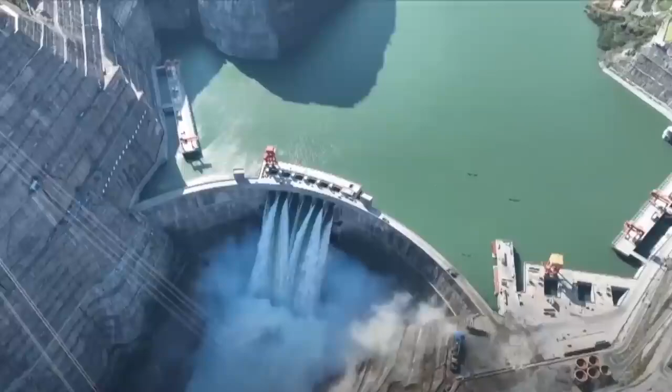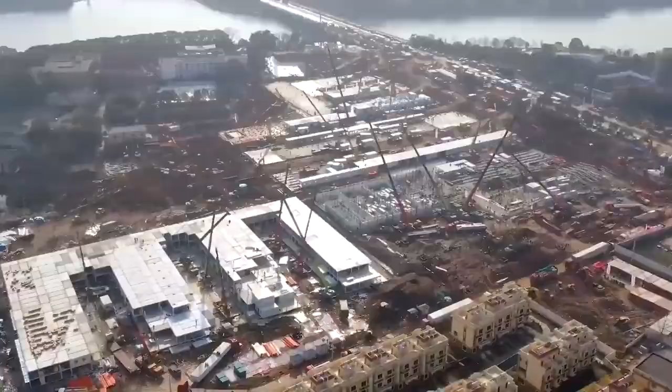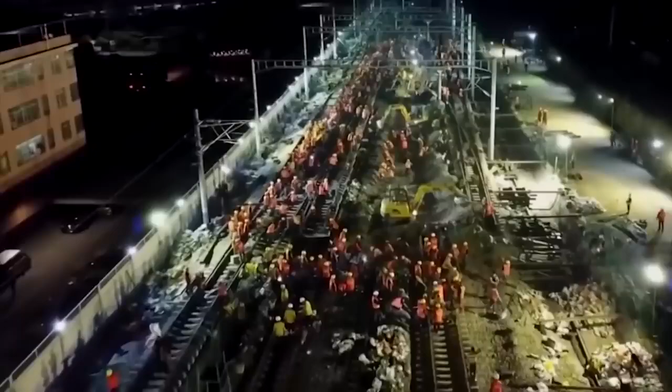Get ready to witness the impossible. China is changing the construction landscape, pushing boundaries with mega projects that leave engineers worldwide in awe. Think colossal dams that generate record-breaking amounts of electricity, tunnels built through impossibly tricky terrain, and bridges that make you feel like you're walking on air. These projects aren't just big, they're fast. China is known for constructing massive highways, sprawling bridges, and sleek high-speed rail lines at mind-blowing speeds. Advanced technology, cutting-edge construction methods, and an unwavering determination fuel this relentless pace. Some might even be shocked by this rapid progress, this ambition that turns blueprints into reality with astonishing efficiency. But how does China do it? What secrets lie behind these engineering marvels? Let's dive in and discover the ingenuity that shapes some of China's most insane megaprojects.

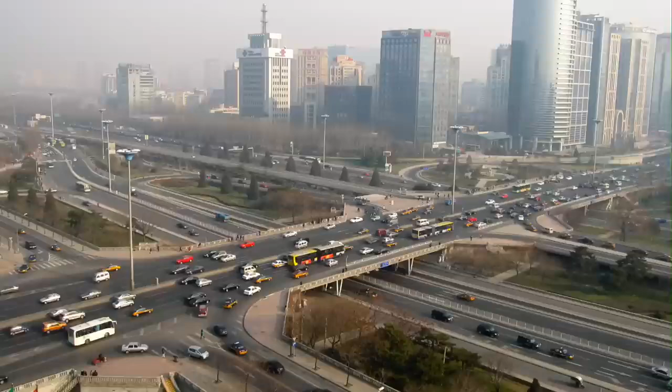The first project on our list, and it's a doozy. Imagine a city's busiest highway artery, choked with traffic day and night. Now imagine the bridge at the heart of this network suddenly becomes dangerous. Traffic can't stop, not for months. It's a logistical nightmare, unless you're a Chinese engineer, apparently. Behold the Sanyuan Bridge Replacement Project. Flashback to Beijing 2015. The Sanyuan Bridge is old, and the traffic load is unbearable. It's literally sagging under the weight. This bridge carries over 200,000 vehicles a day. Replacing it the traditional way would cripple the city for months. Nope, not an option. So here's the plan the Chinese came up with.

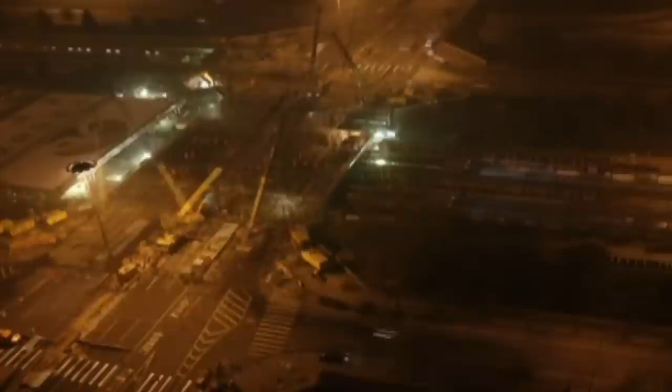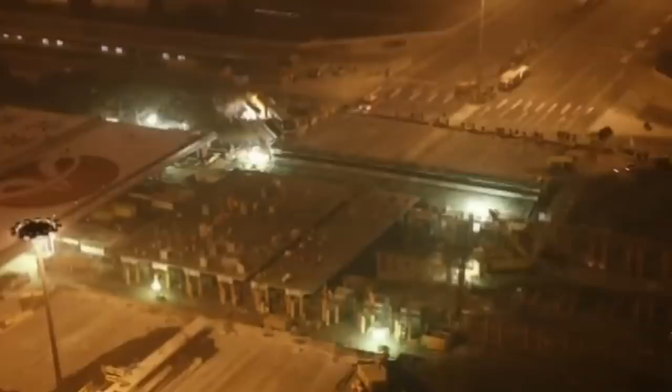Picture this: midnight, November 13th. They completely shut down the bridge. What follows is a symphony of cranes, precision technology, and raw power. The old bridge has to come down, and fast. First order of business: cut that thing to pieces. Saws slice through concrete and steel, breaking the old bridge into 27 giant chunks. The heaviest weighs about 139 tons, nearly twice the weight of a blue whale. Now, the tricky part: this demolition takes place while the old bridge is still partially standing. If we mess this up, the whole thing could collapse. Each of these gigantic chunks has to be lifted off by massive cranes, careful not to disturb the rest of the teetering structure. Talk about high-stakes Jenga.

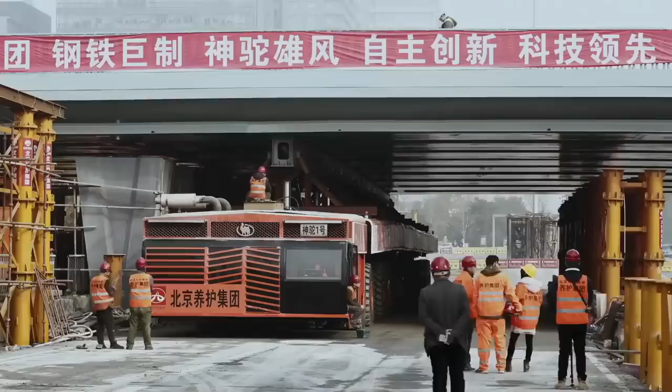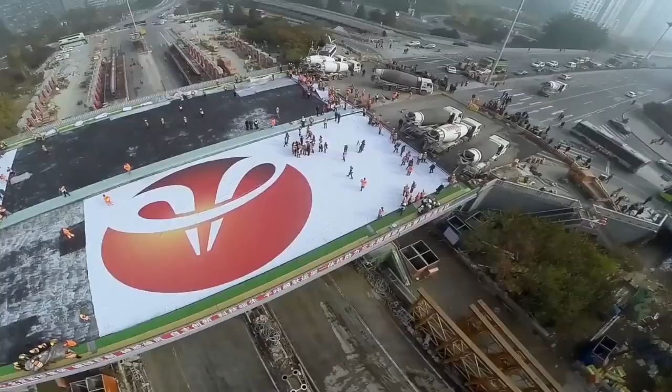But here's where it gets truly wild. While this demolition ballet is happening, the new bridge is nearby. It's massive, nearly 1,300 tons, fully assembled. How do you move something so big so quickly? Enter the Shentuo, two monstrous Chinese-made transporters. These behemoths have 96 wheels each and can lift insane amounts of weight. These machines are linked and synchronized perfectly. They grab the new bridge and start moving it like it's a toy. But here's the kicker: this bridge has to be positioned perfectly onto the old supports. The margin of error? Millimeters. They use GPS, lasers, and the whole 9 yards. It's an engineering marvel in real time. Slowly, with agonizing precision, the new bridge slots into place. And get this, from start to finish, the entire process takes 43 hours.

Less than 2 days, Beijing's traffic nightmare is averted. This project is a masterclass in speed, innovation, and the sheer audacity of Chinese engineering. It makes you wonder what other mind-blowing projects are just waiting to be unveiled. Stay tuned to find out.

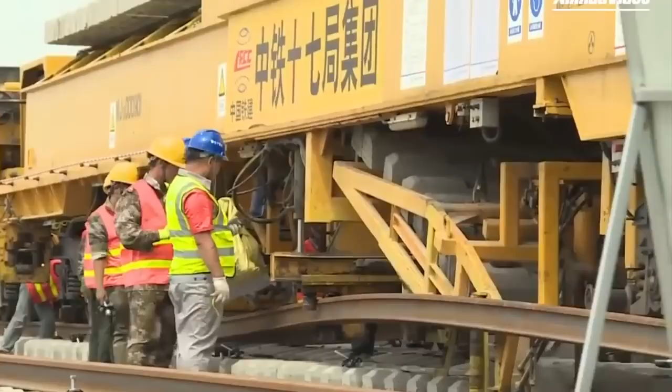Now, buckle up, because if a bridge rebuild in 43 hours impressed you, China's high-speed rail network boasts an even more mind-bending feat: constructing a functional train station in a mere 9 hours. Let's dissect this engineering marvel and see how they pulled it off.

First, some context. This wasn't a brand new station sprouting from scratch. The project involved upgrading a crucial section of track near the existing Longyan Station, a bustling hub in Fujian Province. The goal? To seamlessly integrate the station with a brand new high-speed rail line. Imagine the impact: journeys that once took 7 hours would be slashed to a breezy 90 minutes, thanks to these sleek bullet trains zooming at 200 kilometers per hour.

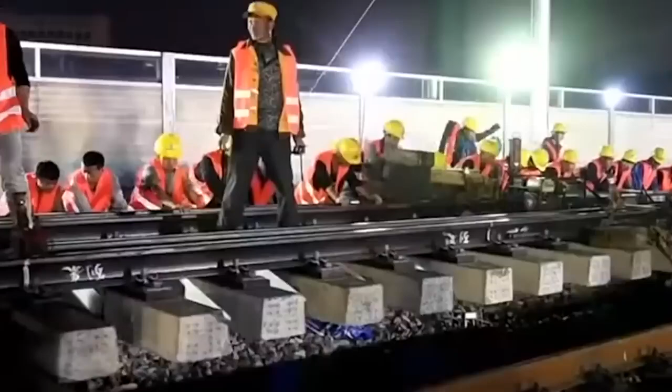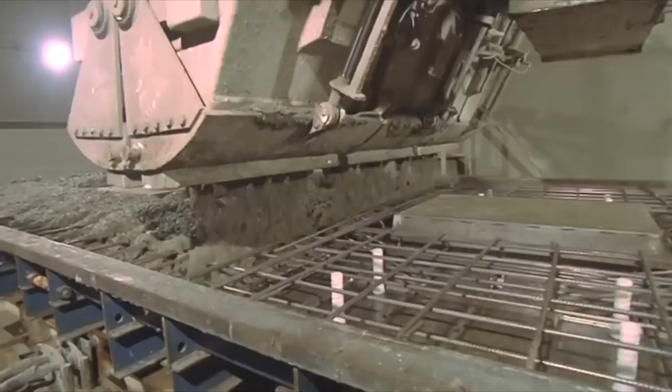Now, here's where the 9-hour magic happens. The key lies in meticulous planning and a heavy dose of prefabrication. Months before the big night, engineers meticulously mapped out every step of the process. Think of it like a high-stakes chess game, where every move needs to be calculated in advance. Prefabrication became their secret weapon. Instead of painstakingly laying the track on site, pre-assembled sections, complete with sleepers and ballast, were cast off-site in dedicated facilities. Imagine giant Lego pieces for a high-speed railway.

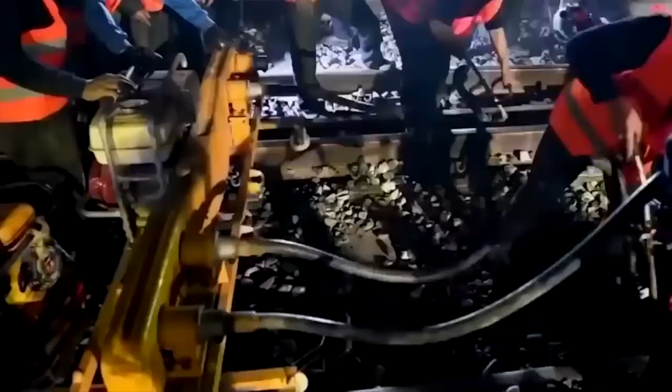The big night arrives, and 1,500 workers descend upon the site with military precision. Time is of the essence. Disrupting a major station like Longyan for an extended period would cripple the city's transportation network. So they work through the night, a well-oiled machine divided into specialized teams. One group focuses on dismantling the existing track, another on meticulously removing the old interlocking system, the complex network of switches that allow trains to maneuver between tracks. Here's where things get fascinating. Remember those prefabricated track sections? They come into play now. Specialized cranes and rail-mounted machinery, pre-positioned for maximum efficiency, swing into action.

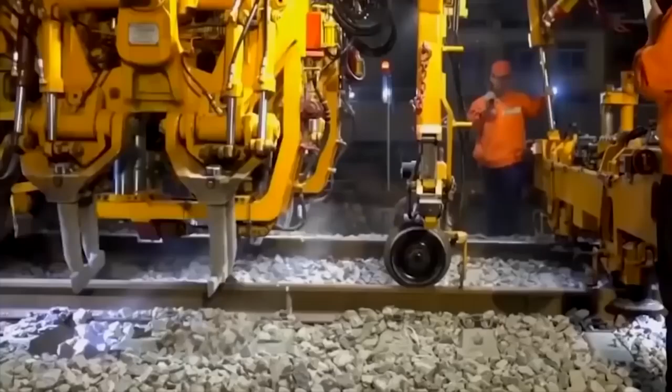The pre-built sections are carefully lifted and slotted into place with laser-guided precision. It's like watching a construction ballet, every movement synchronized to avoid delays. Meanwhile, skilled electricians meticulously rewire the entire section, ensuring seamless integration with the existing signaling system. These guys are the unsung heroes, making sure trains can navigate the new track safely.

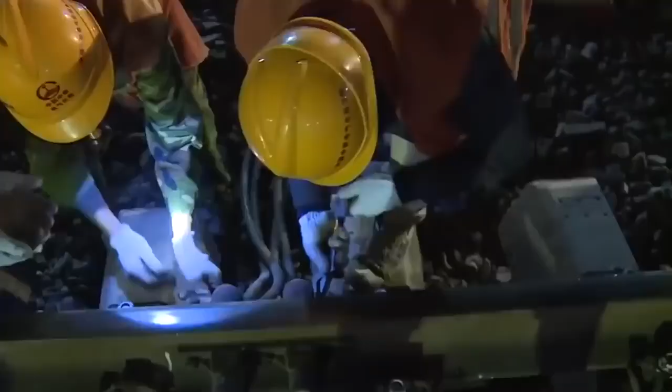As the prefabricated sections are laid, other teams tackle the ballast, the layer of crushed rock that provides stability to the tracks. They use specialized machinery to spread and compact this crucial layer, ensuring a smooth ride for future high-speed trains. With clockwork precision, the teams work through the night.

The old interlocking system is replaced, the prefabricated track sections are secured, the ballast is compacted, and the electrical connections are complete. As dawn breaks, they take a collective sigh of relief. The impossible has been achieved. A fully functional section of track, ready to handle the high-speed behemoths, has been built in a mere 9 hours.

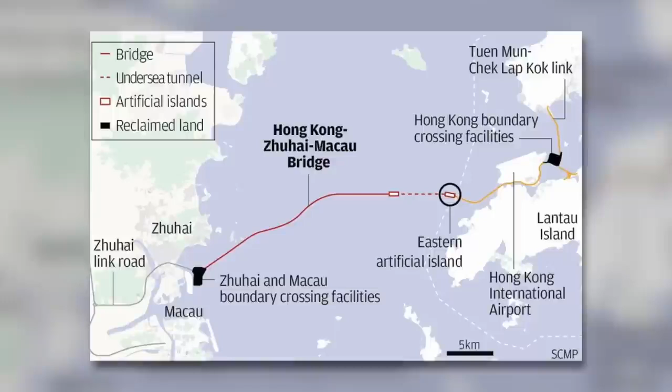If you thought a 9-hour train station was impressive, buckle up. China took on a maritime challenge of epic proportions, designing and constructing the world's longest sea crossing, the Hong Kong-Zhuhai-Macau Bridge. This behemoth, stretching a mind-boggling 55 kilometers across the Pearl River estuary, isn't just about convenience. It's a linchpin in China's ambitious plan to transform the Greater Bay Area, a network of 11 cities, into an economic powerhouse. Here's where engineering ingenuity meets ambition.

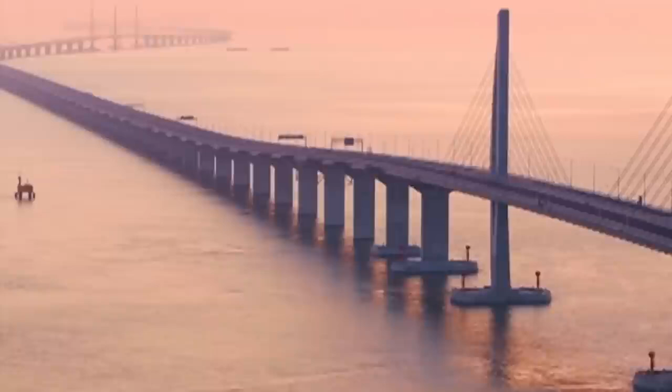This wasn't a simple bridge build. Picture the challenges: frenetic shipping traffic, the wrath of typhoons, and delicate marine ecosystems, particularly those of the iconic Chinese white dolphins. The solution? A complex feat combining bridges, tunnels, and artificial islands.

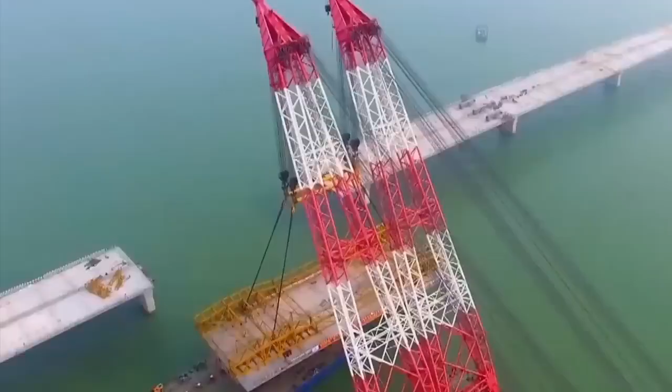Let's focus on the main bridge, a 29.6-kilometer marvel in itself. To minimize disruption and preserve those dolphin habitats, engineers opted for slender, single-column piers anchored deep into the seabed. Above the waves, 3 cable-stayed bridges, each with unique, sail-like towers, rise to support the massive carriageways. It's an aesthetic statement as much as an engineering achievement.

Now, about those artificial islands. These aren't just mounds of sand dumped into the sea. They've been meticulously engineered, structures crucial to the bridge's functionality. They seamlessly transition traffic from colossal bridges to a 6-kilometer-long underwater tunnel. Think of them as giant traffic interchanges in the middle of the ocean.

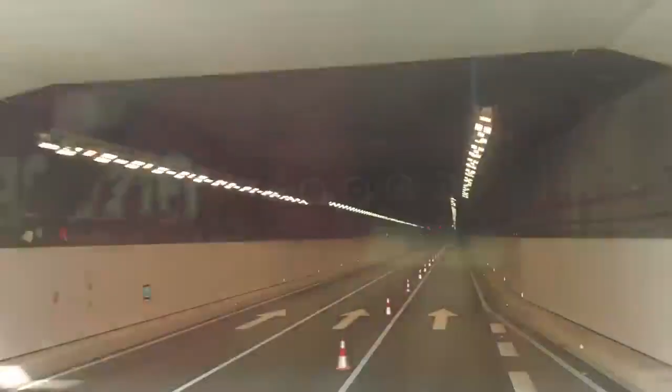Speaking of underwater tunnels, this project features one of the most complex ever built. Instead of boring through solid ground, it's made of 33 massive concrete sections, each weighing a staggering 80,000 tons. These sections were carefully lowered into place, forming a massive underwater highway. It's a testament to the precision and power of Chinese marine engineering.

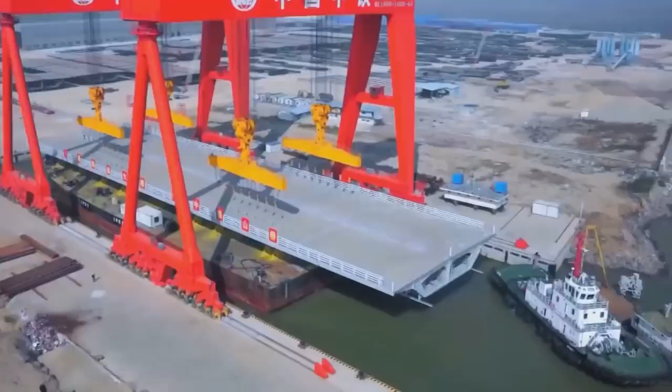And let's not forget the logistics behind this mega project. Coordinating massive construction teams, specialized machinery, and the movement of building materials across land and sea over a 9-year construction period is a ballet of planning and problem solving. The result? A journey that used to take hours by ferry now takes a mere 40 minutes by car. The ripple effects are huge: increased trade, a boost to the tourism industry, and the symbolic binding of major cities into a future regional powerhouse.

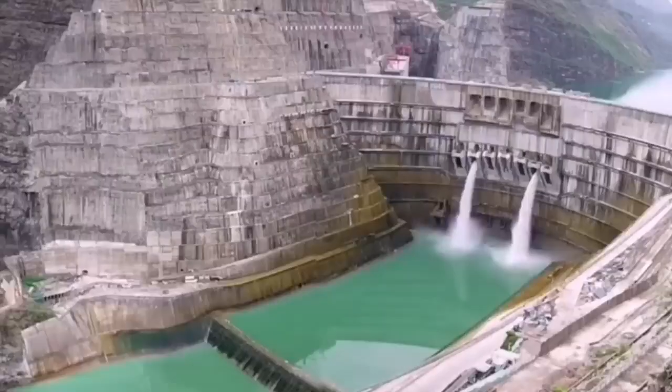The Baihetan Hydropower Station, a testament to China's clean energy ambitions, stands as another megaproject that reshapes our understanding of renewable power. This beast of a power plant boasts an installed capacity of 16,000 megawatts, capable of generating over 62 billion kilowatt hours of electricity annually. But the real story lies in the engineering feats behind its construction.

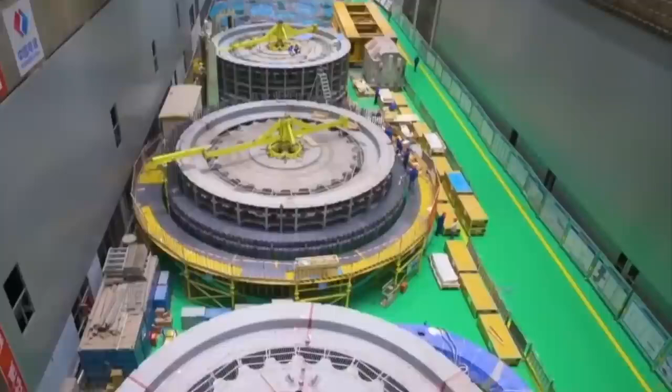Let's start with the heart, the turbines. Baihetan breaks records by sporting 16 gargantuan 1,000 megawatt hydroelectric turbines, the largest ever built. Forget numerous smaller turbines, this approach means lower installation costs, reduced maintenance, and a jaw-dropping energy conversion efficiency of 96.97%. But how did they pull off designing and building such behemoths?

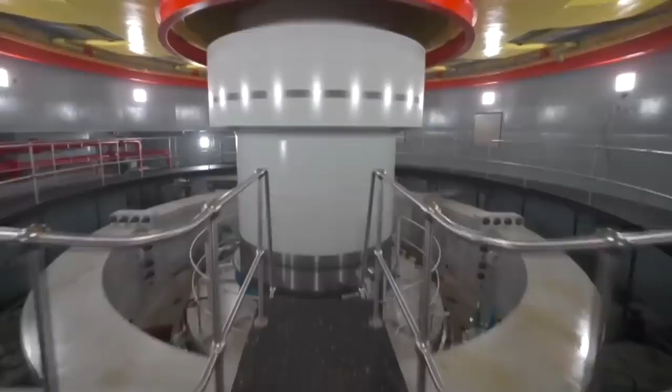Deep within each turbine, a complex water guide mechanism dictates the incoming flow of water. It's a critical component for stability and efficiency. SKF's sealing technology plays a pivotal role here. By minimizing water leakage around moving parts, they've slashed theoretical leakage levels to a mere tenth of what's typical for such massive turbines. This ingenuity directly translates to greater power output.

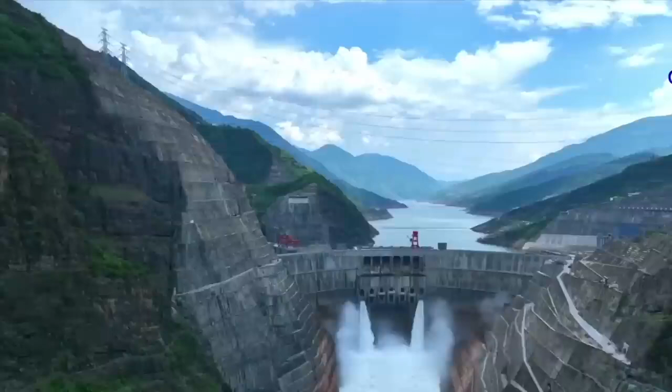Now, let's venture outside the turbines. The force these machines generate is held back by a colossal 289-meter concrete arch dam, the height of a 100-story skyscraper. This isn't just about keeping a lake in place. This structure withstands an unimaginable hydraulic force of 16.5 million tons. It's meticulously engineered to function safely under extreme floods and earthquakes.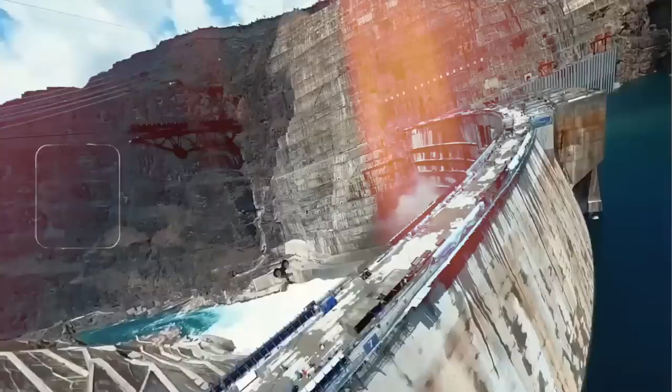To control water flow under emergency conditions, a massive quick emergency gate relies on the world's biggest hydraulic hoist. This beastly cylinder, with its ceramic-coated piston, can lift the equivalent of 800 cars. Inside, SKF's specialized spherical bearings ensure smooth operation and exceptional load-bearing capacity despite the harsh, humid environment.

But it's not just brute force, it's about precision. SKF's sealing technology keeps this hoist functioning flawlessly, preventing hydraulic fluid leaks and protecting internal components. Specialized materials with anti-friction and anti-creep properties are vital for long-term reliability under the relentless pressures of this environment.

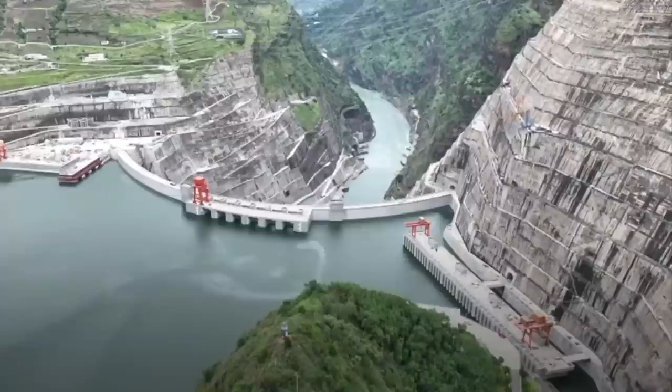The Baihetan Hydropower Station isn't just a source of clean energy, it's a marvel of modern engineering. From the awe-inspiring scale of the Baihetan Hydropower Station, let's shift gears entirely and focus on the lightning-fast construction of a medical marvel, the Huoshenshan Hospital, built in Wuhan, China in a staggering 10 days.

Imagine battling a rapidly spreading virus with limited healthcare resources. That's exactly the situation Wuhan faced at the beginning of the COVID-19 pandemic. To effectively isolate and treat patients, the need for a dedicated medical facility arose with unparalleled urgency.

The Huoshenshan Hospital wasn't built from scratch. It was strategically constructed on the pre-existing logistics site. This smart choice saved precious time on land acquisition and initial groundwork. However, the real marvel lies in how they transformed this empty site into a fully functional hospital in a mere 10 days.

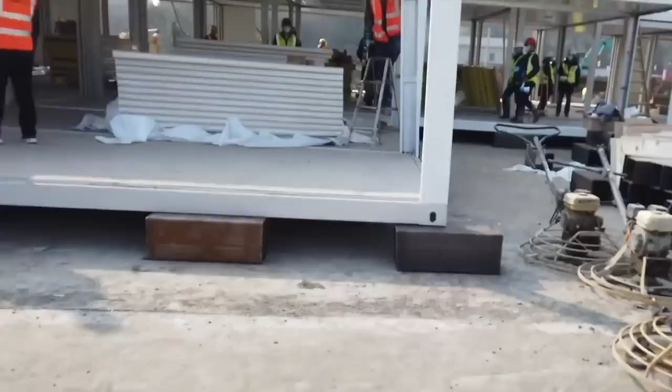The answer lies in prefabrication, a construction technique where key building components are manufactured off-site under controlled conditions. Think of Lego blocks, but for hospitals. Prefabricated wall panels, pre-assembled piping systems, and modular patient rooms arrived on-site ready for rapid assembly. This eliminated the need for on-site bricklaying, welding, and other time-consuming construction processes.

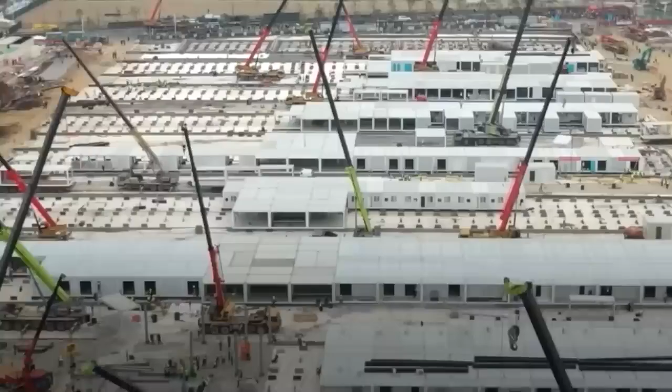But prefabrication is only one piece of the puzzle. To achieve this rapid construction, a staggering workforce of over 7,000 skilled laborers worked around the clock. Imagine a well-oiled machine, electricians installing pre-wired panels, while plumbers connected pre-assembled units. This coordinated effort ensured minimal delays and maximized efficiency.

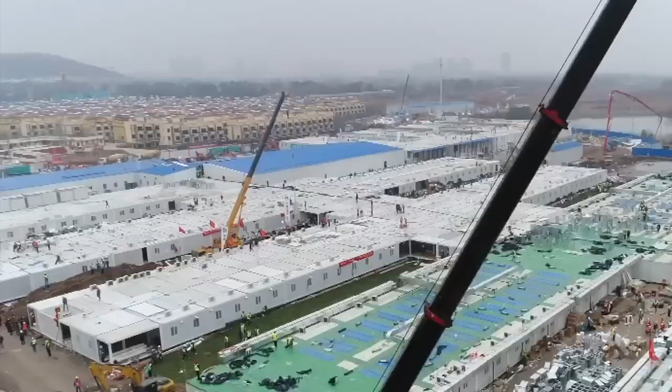Here's where the numbers become truly staggering. The hospital sprawls across 34,000 square meters, boasting 1,000 patient beds spread across 2 floors. To achieve this in 10 days, workers laid an average of 2,500 square meters of prefabricated panels every single day. That's the equivalent of building a new house every few hours.

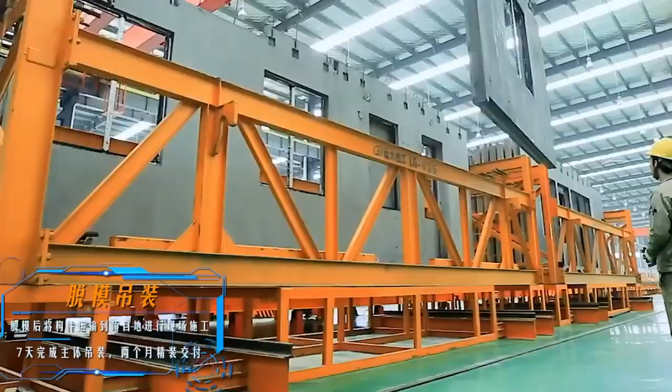But how exactly did these prefabricated components come together so quickly? Months before the outbreak, Chinese authorities had begun investing in prefabricated construction facilities specifically for emergency response situations. These dedicated factories were already churning out standardized wall panels, pre-configured plumbing units, and even modular operating rooms long before the crisis in Wuhan unfolded. This foresight proved invaluable when the need for the Huoshenshan Hospital arose.

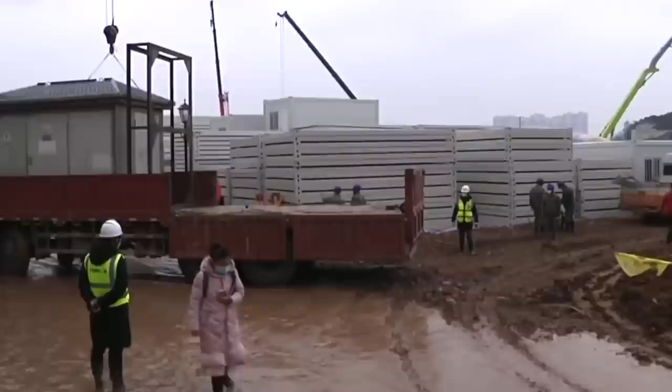With the prefabrication facilities humming, meticulous digital planning took center stage. Advanced 3D modeling software allowed engineers to virtually design and assemble the entire hospital down to the last detail. This digital blueprint ensured all prefabricated components, walls, floors, piping systems, would fit together seamlessly, minimizing the need for on-site adjustments and delays.

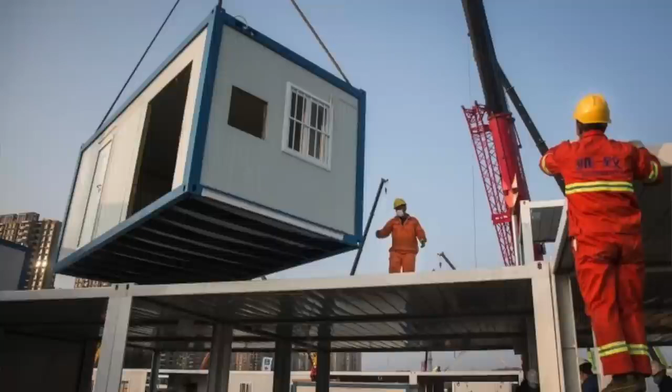Delivering thousands of prefabricated components to the construction site in a timely manner was a logistical nightmare. A sophisticated system was established involving dedicated trucking routes, prioritized clearance at checkpoints, and a meticulously planned unloading sequence at the construction site. This ensured a steady flow of materials without bottlenecks or delays.

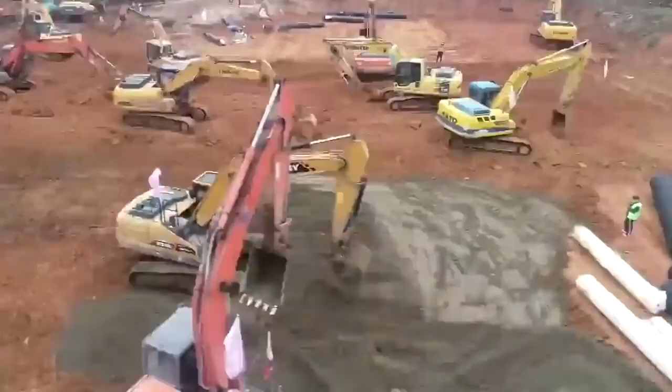While the prefabricated components were being manufactured, the existing logistics site was being prepped for rapid assembly. Bulldozers leveled the ground, foundation slabs were poured, and utility trenches were dug, all meticulously planned to minimize disruption when the prefabricated units arrived. The construction workforce itself deserves a standing ovation.

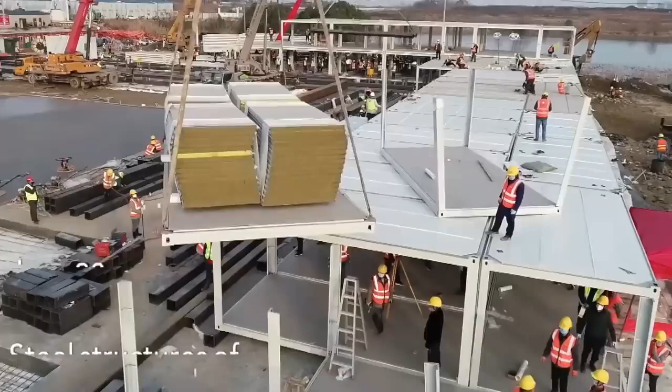Over 7,000 skilled laborers, including carpenters, electricians, plumbers, and ventilation specialists, descended upon the site. Each team had a specific role. Some focused on erecting prefabricated walls, others on connecting pre-assembled piping systems, and others on installing vital medical equipment. The division of labor and the workers' expertise ensured a smooth and rapid assembly process.

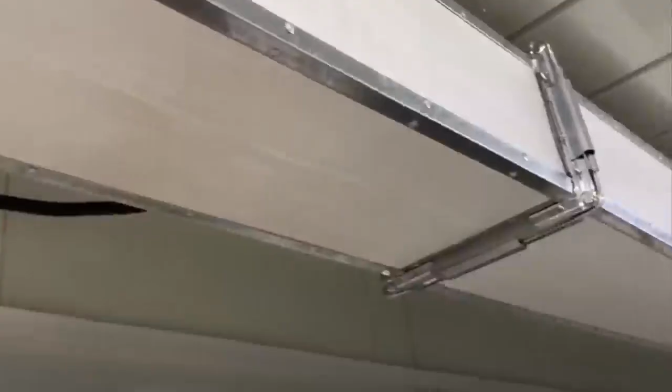The Huoshenshan Hospital wasn't just about speed, it was about functionality. Dedicated isolation wards with negative pressure ventilation systems prevented the spread of the virus within the hospital. Advanced medical equipment, including respiratory machines and diagnostic tools, arrived alongside the prefabricated units, ensuring the hospital was operational as soon as construction was complete.

Building a hospital in 10 days might seem like science fiction, but the Huoshenshan project is a very real example of what's possible when human ingenuity meets innovative construction methods and unwavering determination.

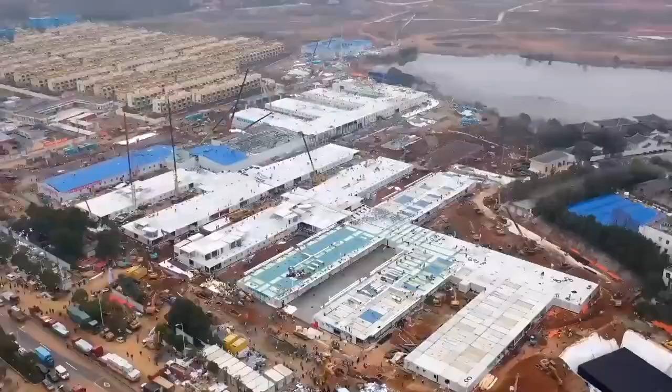China stepped into the African spotlight in 2003 when it began construction on the Merowe Dam, a behemoth aiming to be the largest contemporary hydropower project in Africa. This colossus stretches across the Nile River in Sudan, roughly 350 kilometers north of the bustling capital, Khartoum. But the Merowe Dam isn't just about size, it's a marvel of modern engineering, harnessing the Nile's mighty flow to generate electricity for millions.

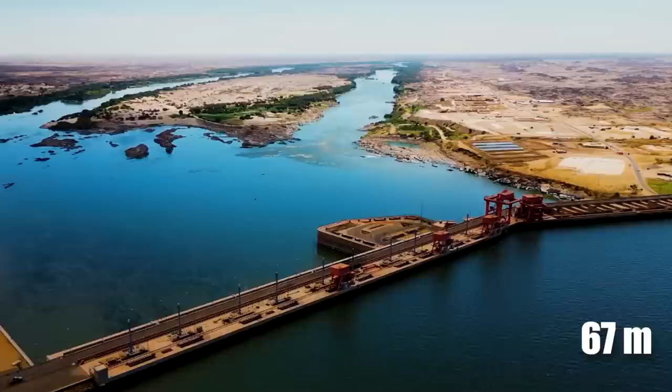At a staggering 9 kilometers long, the dam's sheer scale is enough to steal your breath away. Imagine a wall over 5.6 miles long, its crest reaching up to 67 meters. That's taller than a 20-story building. But the dam isn't a single, uniform structure. Chinese engineers designed it with a multi-pronged approach to maximize efficiency and stability.

The core of the dam lies in the left river channel, where an 883-meter-long earth-core rock-filled dam stands guard. Picture a giant mound of earth and rock, its core meticulously compacted to form an impermeable barrier. This isn't the only line of defense, though.

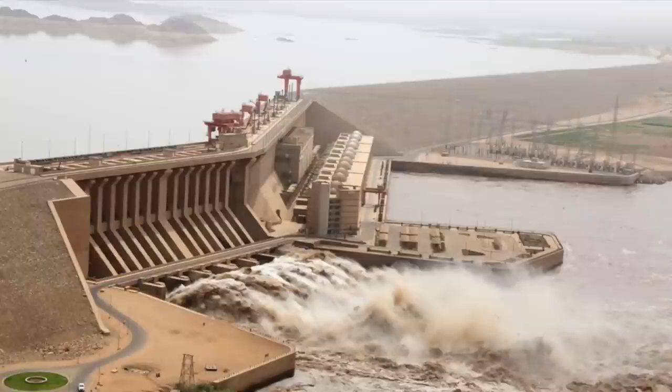Flanking the earth core dam on either side are massive concrete-faced rock-fill dams. The right bank boasts the larger of the two, stretching 4.3 kilometers and reaching a height of 53 meters. The left bank's dam isn't far behind, clocking in at 1,590 meters long and 50 meters high.

But dams aren't just about holding back water. They need to control its flow for power generation. This crucial role falls on the dam's live water section, situated on the right bank of the Nile. Here, a network of sluices allow for controlled water release, while a 154-meter-long spillway ensures safety by providing an overflow channel during periods of high water levels.

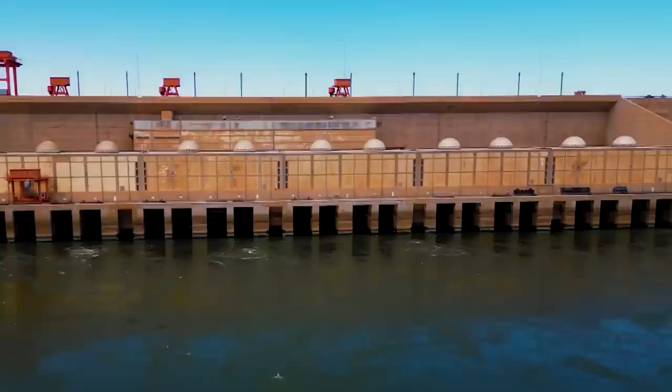However, this section's crown jewel is the 300-meter power intake dam, which houses the turbines that convert the Nile's energy into electricity. Speaking of turbines, the Meroe Dam boasts 10 125-megawatt Francis turbines. Each of these mechanical marvels is designed to handle a flow rate of 300 cubic meters of water per second, a mind-boggling amount.

Imagine 10 giant water wheels, each spinning with the force of a raging river, churning out a combined potential electricity yield of 5.5 terawatt-hours annually.

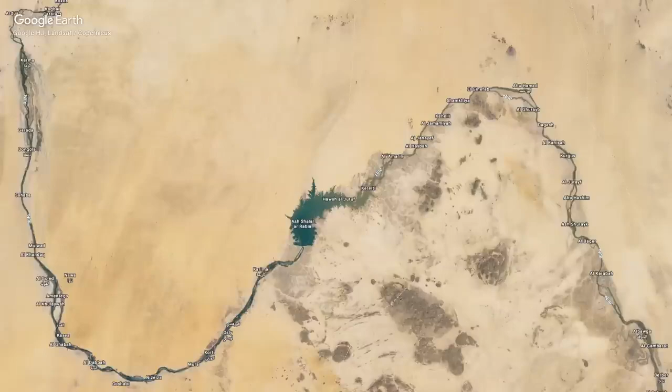To handle this surge of power and distribute it across Sudan's vast network, a massive upgrade of the country's electrical grid was undertaken alongside the dam construction. This ambitious project involved laying over 1,500 kilometers of new transmission lines, including a 500 kilovolt aerial line that cuts across the Bayuda Desert to reach Atbara, Omdurman, and Khartoum. Further east, 220 kilovolt lines snake their way towards Port Sudan, while others head west along the Nile, connecting Meroe to Daba and Dongola.

But beyond its grand scale, the Meroe Dam is a complex feat of design and construction, where every meter of the dam wall, every cubic meter of water flow, and every megawatt of electricity is meticulously calculated to achieve optimal efficiency and performance.

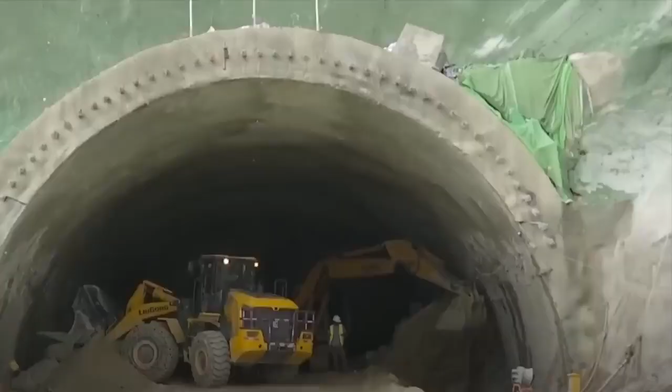China's reputation as an infrastructure powerhouse comes from its boldness, a willingness to tackle projects that others deem impossible. One such challenge was the Humaling Tunnel in Gansu Province, labeled the most difficult tunnel to build. A mere 173 meters of this tunnel left engineers worldwide stumped, even after Germany, a nation renowned for its engineering prowess, threw in the towel. Yet China persevered, and after 6 long years, the seemingly impossible tunnel was finally completed.

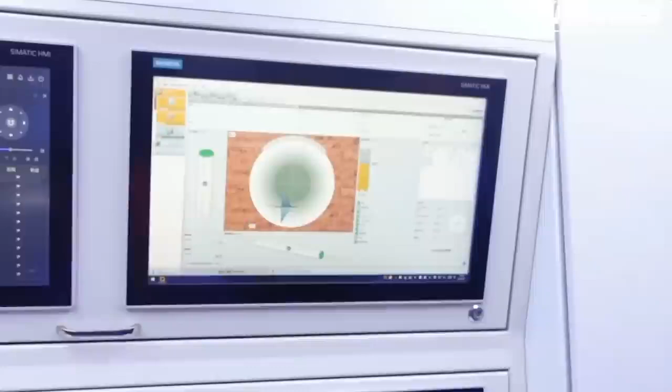So what made the Humaling Tunnel so uniquely problematic? It all boils down to geology and location. This tunnel wasn't just cutting through solid rock. Its path crossed a reservoir and a river, saturating the surrounding earth. The soil was predominantly loess, a notoriously loose and unstable material that tends to liquefy when disturbed. Think of trying to tunnel through quicksand.

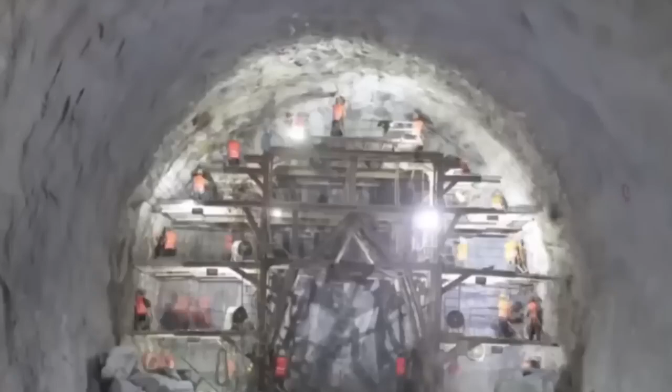Imagine the scene. Digging commences and the soil around the tunnel starts to crumble and shift. Cracks appear, threatening to collapse the entire structure. To make matters worse, heavy rains would further destabilize the ground, potentially leading to catastrophic cave-ins. Safety concerns loomed with every meter of progress.

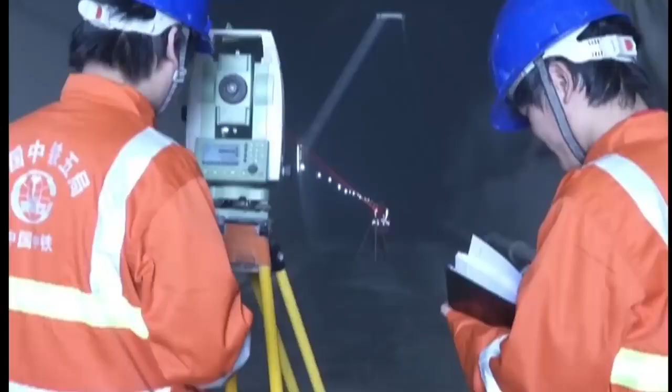With conventional methods proving ineffective, China sought the help of international experts. But expert after expert, faced with the Humaling Tunnel's loose, waterlogged earth, was left scratching their heads. No feasible solution was in sight. The tunnel quickly became a symbol of engineering's limits, appearing on lists of the world's most intractable construction problems. It earned the nickname Tofu Tunnel, highlighting its frustratingly fragile nature.

But China wasn't about to give up. Determined engineers devised a daring plan, combining innovative technologies and meticulous execution. They adopted a cautious, step-by-step excavation method alongside vacuum dewatering to stabilize the soil. The work was fraught with danger. Sudden surges of water and sand into the tunnel became a terrifyingly common occurrence.

Over 6 years, a team of 1,200 workers toiled in shifts to overcome the challenges. Progress was painfully slow, averaging a mere 2 to 3 meters per day. The harsh climate added further hurdles. In icy winters, an entire team was dedicated to ice breaking to prevent the waterlogged soil from freezing over, which could halt construction entirely. But perseverance paid off.

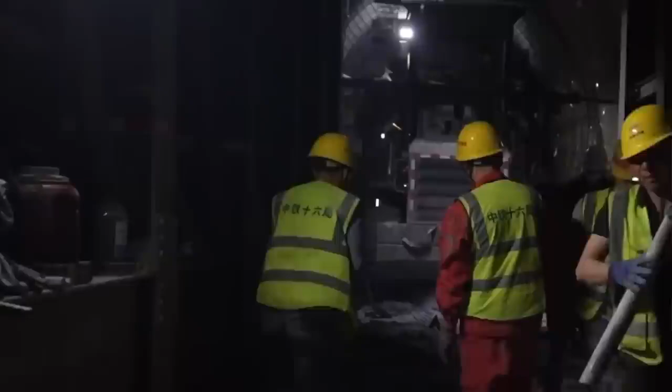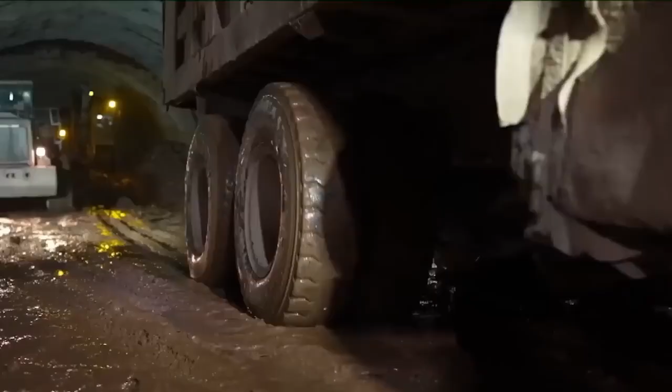Finally, after 6 grueling years, the Humaling Tunnel was complete. News of its success echoed around the world. It became a testament to Chinese engineering ingenuity, a symbol of the nation's refusal to yield in the face of immense challenges. The Humaling Tunnel, while small in size, represents a massive victory for China. It filled a critical gap in the Lanyu Railway, a lifeline connecting the Yellow and Yangtze River basins. Its economic impact ripples across the region, boosting trade and tourism along its route.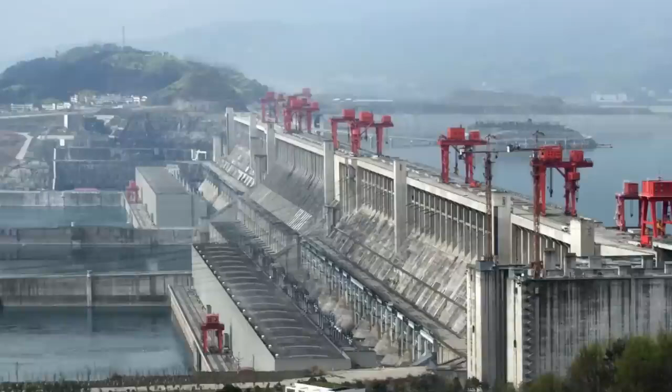Picture the mighty Yangtze River, once a force of nature, carving its way through the breathtaking Qutang, Wu, and Xiling gorges. Now imagine this untamed river harnessed, its power transformed into electricity and a navigable highway through the heart of China. This vision became a reality with the construction of the Three Gorges Dam, an engineering marvel that stands as the world's largest hydroelectric project.

This dam is nothing short of colossal. It spans a mind-boggling 2,335 meters across the river and towers 185 meters high.

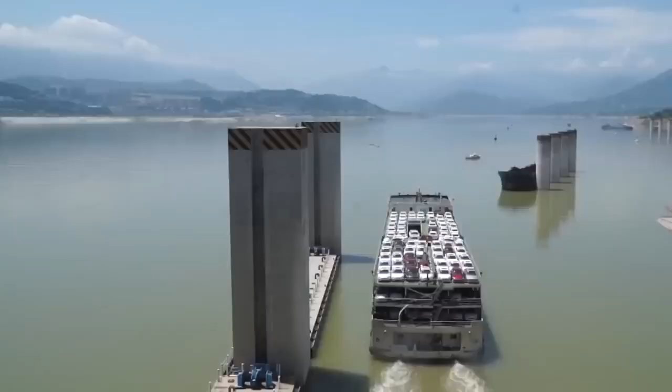To create this behemoth, engineers used a staggering 28 million cubic meters of concrete, enough to fill thousands of Olympic pools, and integrated 463,000 metric tons of steel into its monolithic structure. But the Three Gorges Dam isn't just about size, it's about reshaping a landscape to unlock the river's potential.

The dam's construction flooded the 3 scenic gorges, creating a vast reservoir that stretches 600 kilometers upstream. This new deep-water highway allows massive ocean-going freighters to sail over 2,000 kilometers inland, from the East China Sea all the way to the bustling city of Chongqing.

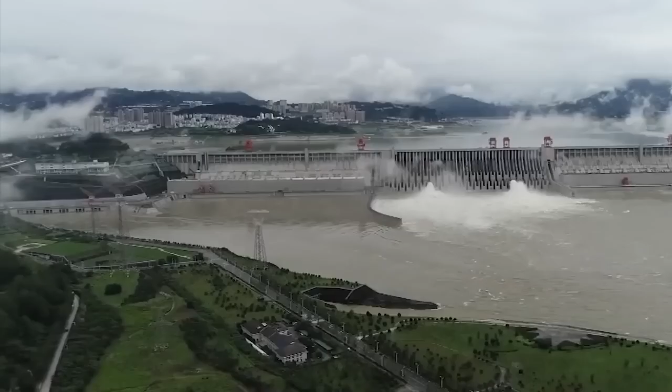Think of the logistics required to navigate this massive dam. Engineers designed a series of 5-tier ship locks capable of lifting and lowering vessels weighing up to 10,000 tons. For smaller ships seeking faster transit, there's an even more incredible feat of engineering: the world's largest ship lift. This colossal elevator for boats bypasses the locks, ensuring swift passage past the dam.

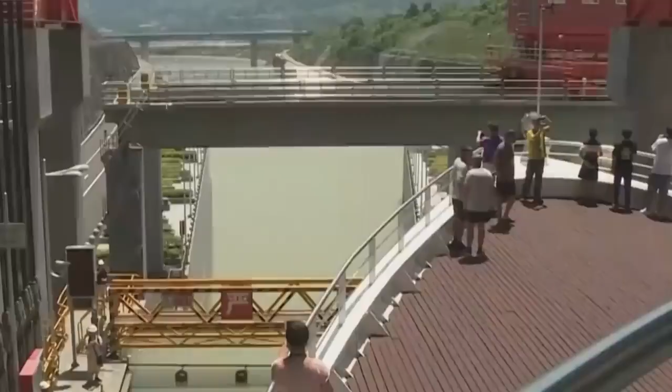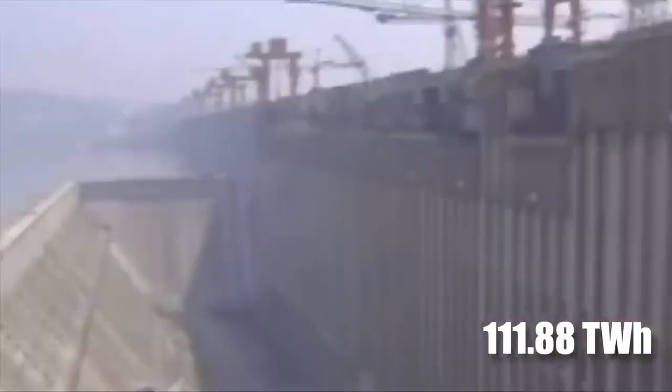The heart of the Three Gorges Dam lies in its power generation. Deep within its massive structure, 32 powerful turbine generators spin with the force of the Yangtze, turning the river's flow into electricity. These turbines make the Three Gorges Dam the most productive hydroelectric power station on Earth. In 2020, it generated a record-breaking 111.88 terawatt-hours of electricity, enough to power millions of homes and fuel China's relentless growth.

The Three Gorges Dam was also built to provide a vital defense against the devastating floods that historically plagued the Yangtze Basin. Constructing a project of this scale was an epic undertaking. It involved displacing communities, excavating over 100 million cubic meters of earth and rock, and pouring millions upon millions of cubic meters of concrete. This colossal construction site buzzed with thousands of workers, a testament to the sheer human effort and engineering feats required to tame a river and transform a landscape.

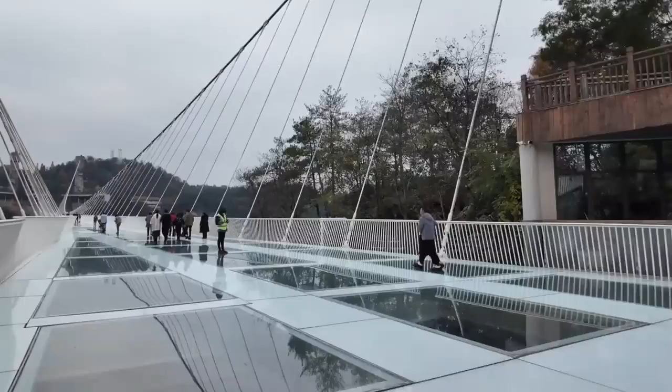China isn't just about massive dams and colossal power plants. Sometimes its mega projects are built on a foundation of audacity and glass. Have you ever dreamed of walking on air? Picture yourself suspended 300 meters above a breathtaking canyon, a mere sheet of glass separating you from the vast expanse below. That's the spine-tingling experience of crossing China's Zhangjiajie Glass Bridge, the world's longest and highest glass-bottomed pedestrian bridge.

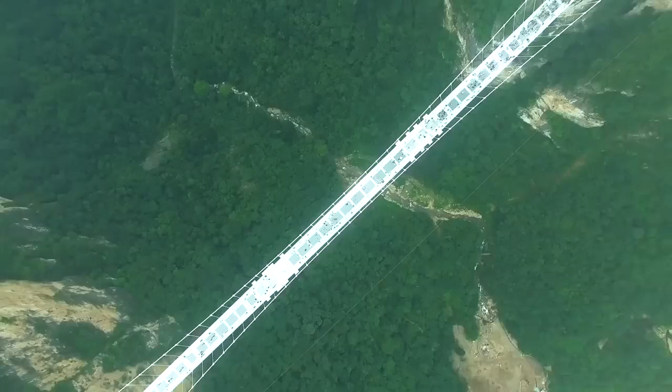This marvel of engineering pushes the boundaries of both construction and perception, creating an illusion of weightlessness that will leave you in awe. Stretching 375 meters across the Zhangjiajie National Park, this transparent walkway is supported by massive steel girders filled with reinforced concrete. The bridge weighs a colossal 2,200 tons, a reassuring heft for those who dare to tread on its glassy surface. With a budget of around 460 million yuan, roughly 48 million pounds, no expense was spared in ensuring both its beauty and its safety.

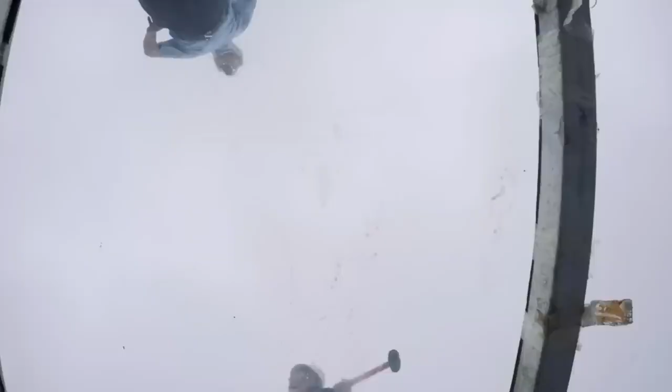The true magic of the bridge lies in its glass deck. It's constructed from a triple layer of specially hardened glass, each layer a substantial 50 millimeters thick. This isn't the kind of glass that shatters at the slightest tap. To prove its resilience, engineers conducted the ultimate stress test. They drove a 40-ton truck over a glass panel, resulting in a mere 2-centimeter deflection. They even invited people to smash the glass with hammers. While the top layer shattered as expected, the crucial bottom layers remained intact, an undeniable testament to the bridge's strength.

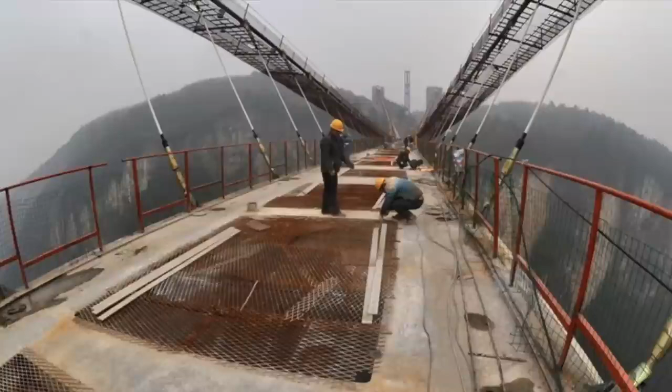However, building a see-through bridge at such heights presented unique challenges. Wind forces at that altitude are a major concern. The original design featured glass handrails, but that idea was quickly abandoned. Those railings would have acted like sails in strong winds, potentially destabilizing the entire structure. To combat this, discreet steel poles were used instead, allowing wind to pass harmlessly through and minimizing vibrations.

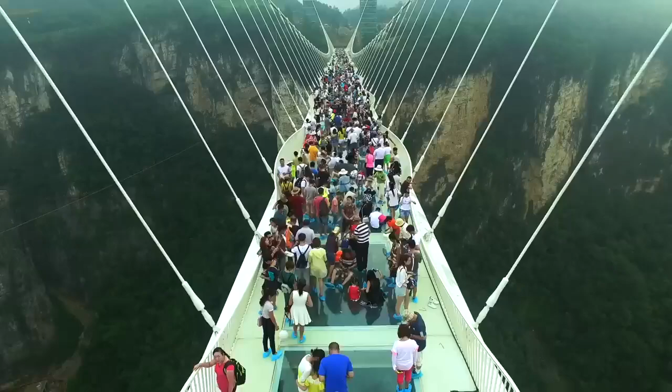Safety features go beyond the sturdy construction. Giant glass balls, each weighing a hefty 500 kilograms, hang beneath the bridge to dampen vibrations. Massive water reservoirs further stabilize the structure. Finally, strategically placed bends in the railings break up the rhythm of walking pedestrians, preventing the kind of resonant vibrations that famously plagued London's Millennium Bridge when it first opened. These features ensure that Zhangjiajie Glass Bridge can handle both the crowds of thrill seekers and the whims of nature.

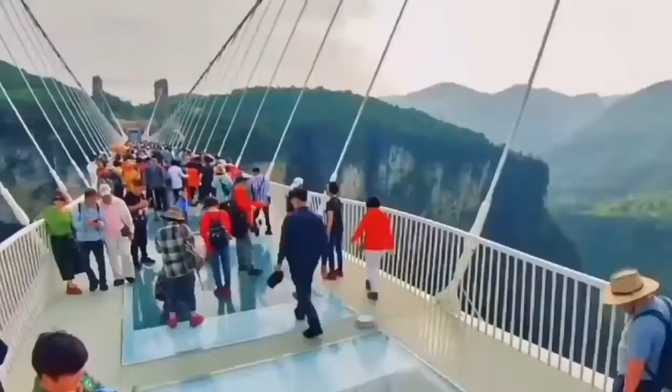The result is a bridge that offers more than just a terrifying walk. Bungee jumpers can now plunge towards the canyon below, adding an extra layer of adrenaline to the experience. But what makes this bridge truly unique is its ability to make you feel like you're floating in midair. As you step out onto the transparent glass, the world seemingly drops away beneath your feet. The focus isn't on the bridge itself, but on the breathtaking expanse of the canyon, giving you a bird's-eye view that's both exhilarating and slightly mind-bending. It's a testament to the power of engineering and design, working together to create an experience that transcends mere construction and transforms into an unforgettable adventure.

China's ambition knows no bounds. These mega projects are just a glimpse into their engineering prowess. Know any other mind-blowing projects? Share them in the comments.